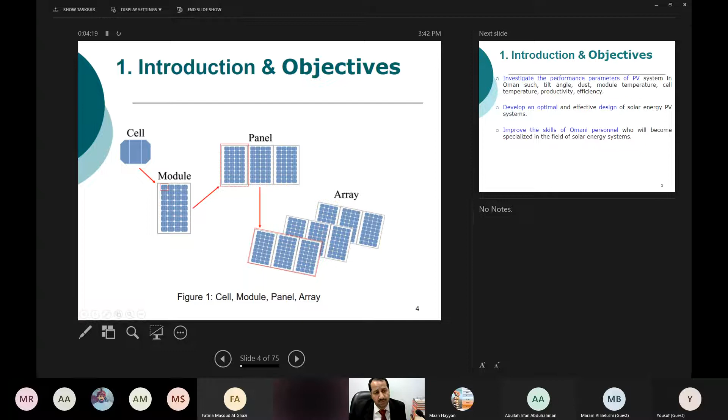If we put them in series, as you can see, we come up with panels. We put them together to come up with an array, or solar plant, whatever you call it, matrix. This is a large part of the energy produced by this array.

In 2011, I got this grant funded by the Research Council - 50,000 Omani Riyal - to answer a question for the government. The question was: if the government would like to invest at large scale, because here we're talking about billions, how should the system we install look like, or the technology to be used? What are the optimum design parameters? What is the evaluation in terms of technical or economical aspects? All these needed to be answered.

You may say, okay, many researchers already started this 20-30 years before. Yes, that's right, and good publications came from different universities and Omani researchers. But what happened is, when we go for investment, it's not enough to have research for research, or scientific research, or basic research, or applied research. We need some sort of research which we call research for investment.

It means we dig deep, because these billions need to be returned back, and there is some profit on them. It's not that we are doing research for education - no, we are investing, so we need to make sure.

Many examples are available in the region where people go directly to investment without having such studies, and at the end it comes up with a fail rather than success.

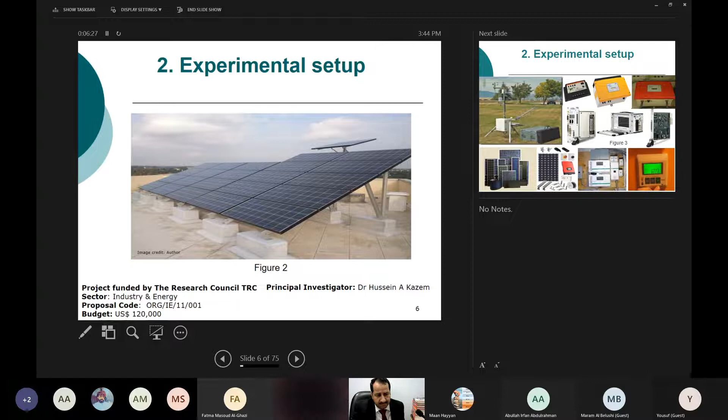So this was the system at the end, and it was funded. The number of this grant was ORG/IE/11/001. It was an opportunity for me to have money, to bring equipment and to establish a renewable energy lab.

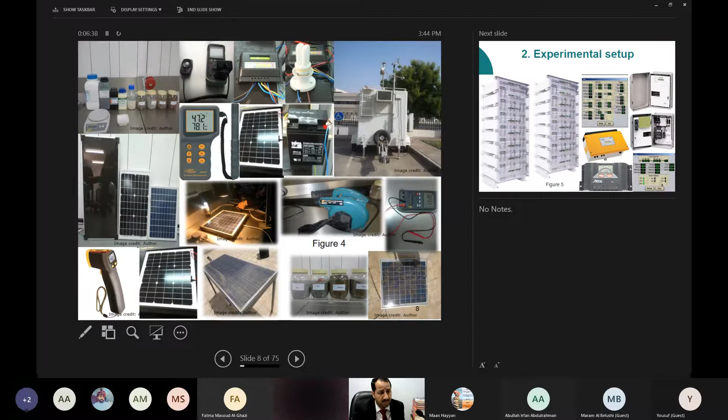These are some of the equipment we purchased through this grant. And as usual, I thank the Research Council of Oman for supporting me all these years, and I was engaged with them in many of their activities.

And then the difficulties came when I started executing the project. You know that any project needs to start with theoretical calculation, literature survey, methodology, and these stuff.

When the idea is clear in front of you, you move to installation, purchasing equipment, and then installing. I would like to take you on a journey through a few photos. The photos will talk about themselves, and there are many stories behind each one. I try to summarize here the important photos, otherwise there are many.

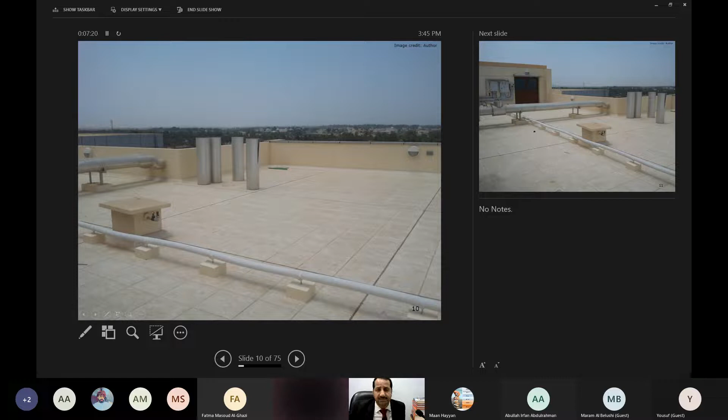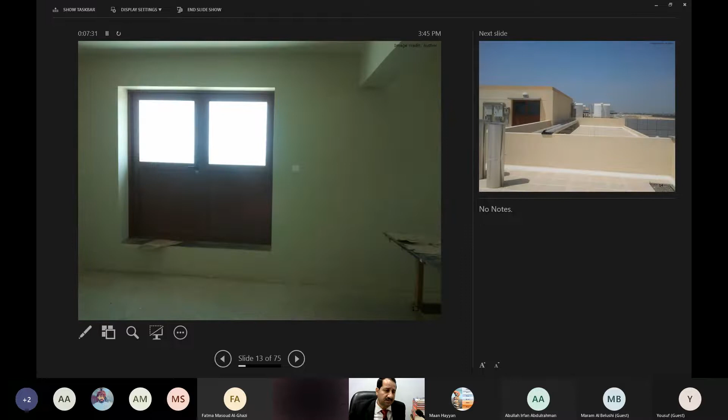This is the place given to me on the engineering building in Sohar University. Look how it looked like at that time - this is 2011, inside the building on floor level 4, and as you can see here, how it looked, the location. Then I start putting a plan to have two labs, one for the students and one for research.

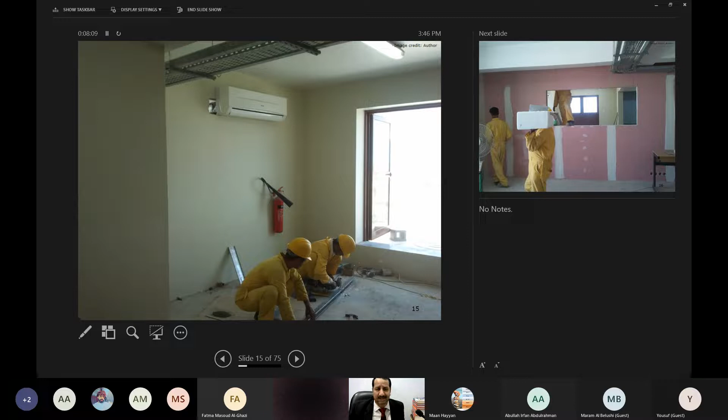Since I've been teaching renewable energy course for Sohar University since 2007, which was the first course in renewable energy in the Sultanate, I start to engage and introduce all the concepts which can be used and linked to my course, because when the students come to the lab, they can see what they already studied in the theoretical part.

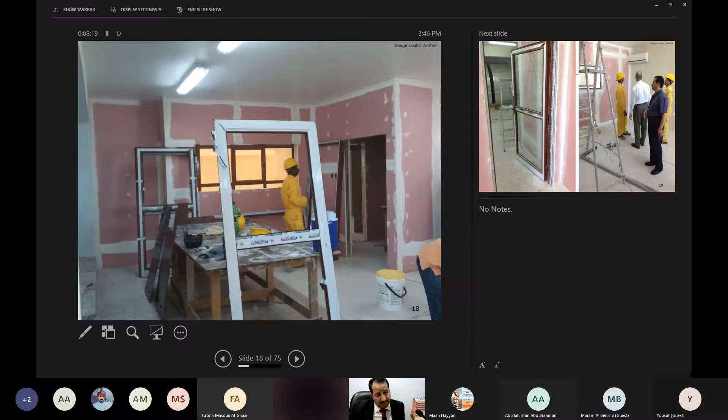So eco houses principles, using the material, all these have been introduced in this lab as much as I can. Then I try to spread them out, as you can see, and we build the doors, the installation, electricity, painting. You can see here the trunk for the electrical installation part.

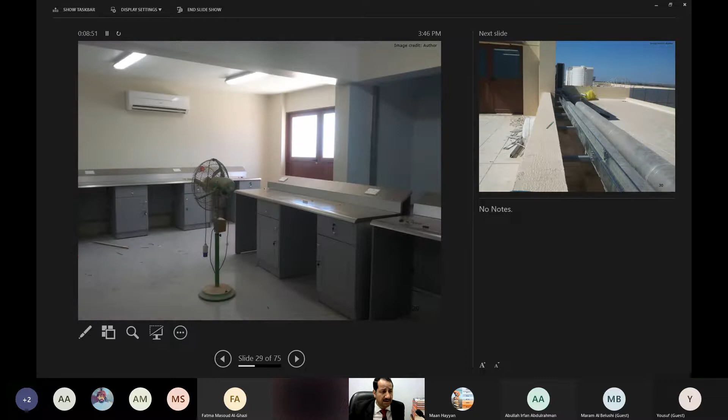Then we moved to have air conditioning. This part was supposed to be a store, but without electricity, with nothing. Then I started establishing it as a renewable energy lab. It's a small lab, but still its productivity is high. Then I brought some furniture for the renewable energy lab related to the students.

And this is, I put here trying to have the cables going to my lab, because I put our equipment outside. Then we clean the place.

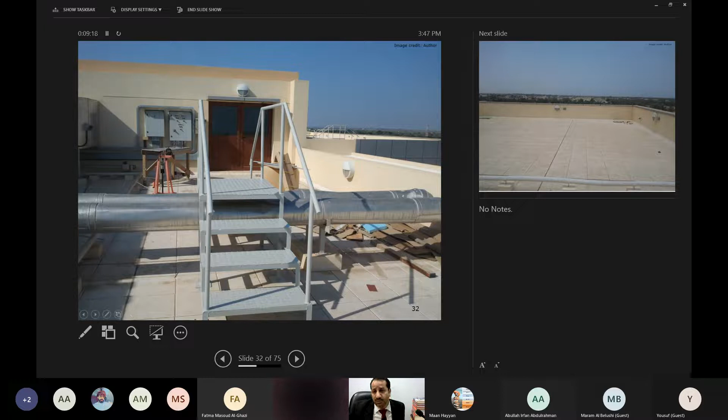But at that time, you know, this region - talking about the Middle East in general - they just started, it's 30, 40 years back, started with research. Still people are not familiar with the grants, with deadlines, blah blah blah. So you imagine this ladder took from me 3 months with dozens of emails to convince people there that I need a ladder, because students cannot jump crossing these pipes.

And then we start doing the concrete and take it to the other side of the building, and then this winch took the concrete to the other side of the building, and then we move it into the right location. This is the weather station where it went.

By the way, the budget was limited, so I have to try to spend it carefully and make sure that I brought as much equipment as possible. Sometimes I need to sacrifice. As an example, in this weather station, I couldn't bring an expert to install it because it would cost around 5 to 6,000 Omani Riyal, which I wanted to save for other equipment.

So I did it by myself, and I learned a lot about the weather station - how you connect the sensors, how you set them, how you program them, and if faults happen, what you should do.

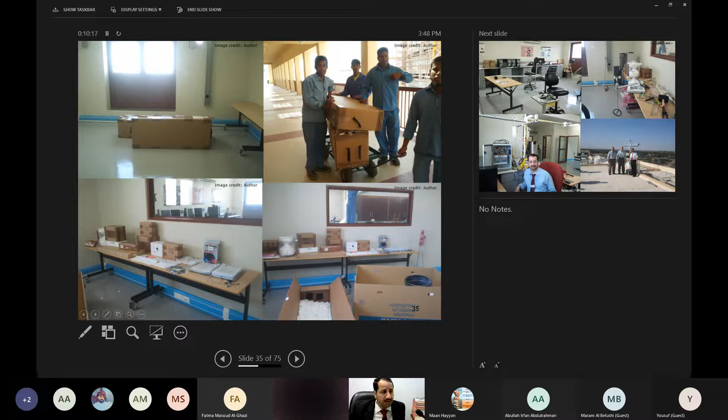And then I moved it here to the lab. Then I opened the sensors here - it was at that time 13 different sensors, and I start connecting these sensors on the weather station. Here I'm programming the data logger, and then I put it on top of my lab.

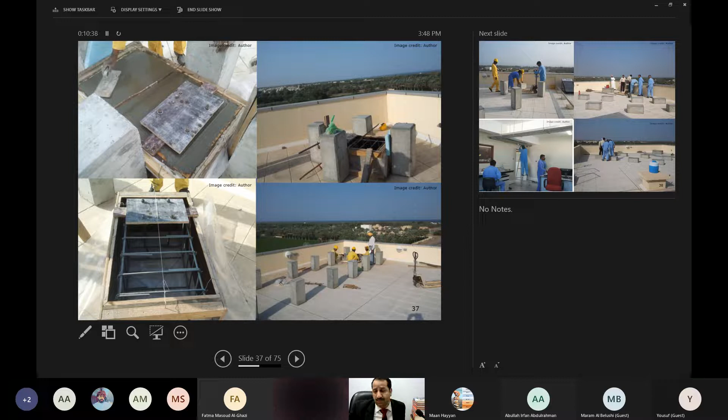Some concretes for specific systems need to be produced on top of the building, so we did this one for a tracking system, as you can see here.

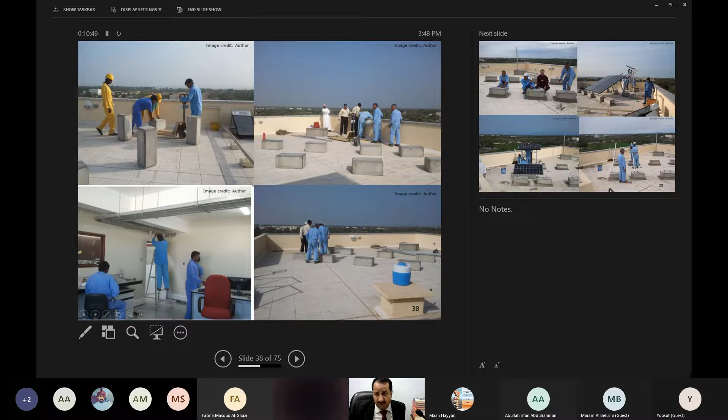After that, the company I worked with came to establish and install the system according to my calculations - the orientation I chose was based on the calculation - and then we start building the system, as you can see here, step by step.

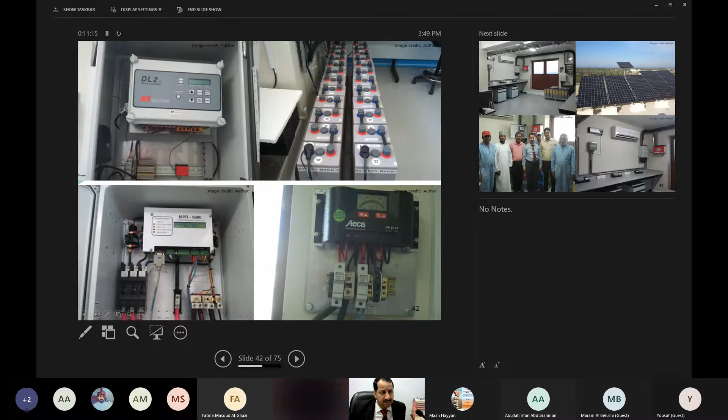I leave photos talking about some people working inside the lab to establish the data logger, collectors, batteries, loads, sensors - these are the batteries, data logger, charge controllers for different systems.

And then here we have, outside, the three systems: this is the grid system, this is the standalone system, this is the solar tracking system. And then inside here we start - these are people working on this project to establish the system.

Then I decided to have my own monitoring system. I selected at that time state of the art sensors used in the field, and then I made a plan for having a specific data acquisition setup. I designed it using my skills in digital logic and digital electronics.

Then I worked with a specialist, Dr. Riyah from the UK. He came here and we worked together to build this sensoring system to make sure that my data, taken from different sources, for research and for investment purposes, could be calibrated so we could compare between them. So we did this as part of, let me say, creativity.

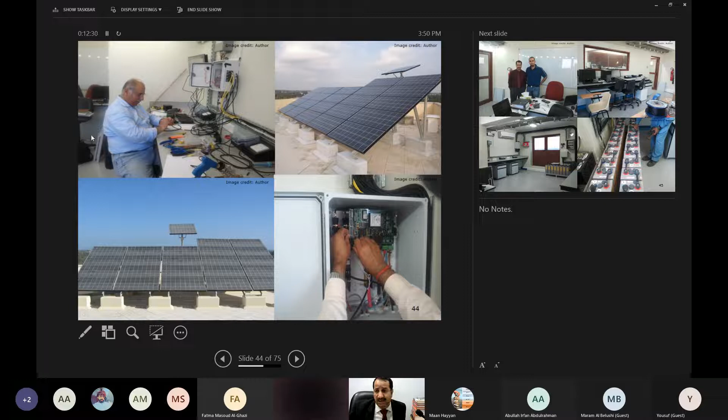And this is Dr. Tamer, my research assistant at that time. We worked together on this project, and here we have the system ready.

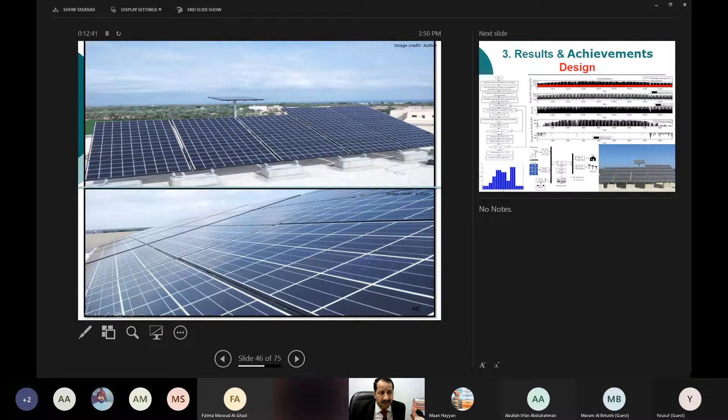For achievement, we published many papers, around 40, Q1, ISI and Scopus, in top ranked journals in solar energy, renewable and sustainable energy, energy conversion and management, sustainability, and many others with different publishers, including Elsevier, Springer Nature, Taylor and Francis, and many more.

So here I'll just pick part of my results. You can see here, on the level of design, we have a lot of information we came up with. I'll leave that there. By the way, at that point when I started working on the design to find the

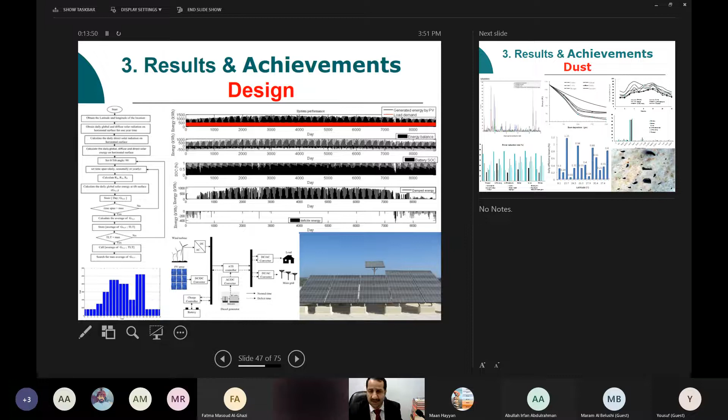optimum design for Oman, as you know, any location is related to its latitude and longitude. It will not change since it was created, since God created this planet. It is there, it's specified. But until I started this study, nobody had found the optimum design parameters for this location, which is Oman. I got it, and it's fixed. Whoever comes after me to find the optimum will not find something different from what I already got. So this is, let me say, my fingerprint, if you can say.

And then I investigated dust, many publications published on this, and it was really important to have studies on dust, especially in this region, which suffers from dust, solar radiation and temperature, and their impact also.

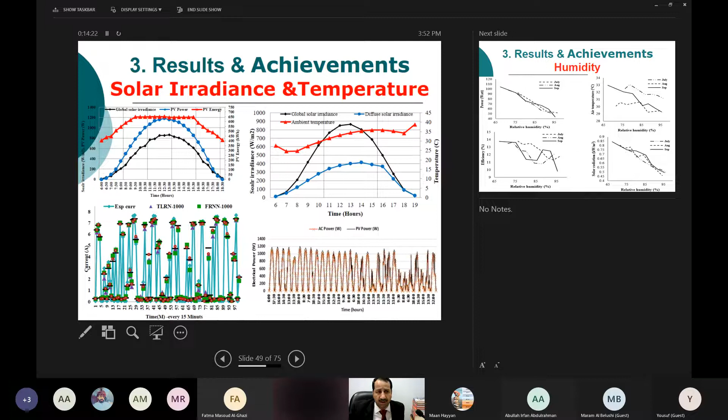If you would like more information about this, you can just Google it or access my ResearchGate, Scopus page, or Google Scholar, and search solar energy Oman. You'll find many of my publications with more information about solar energy. We also published on humidity and its impact.

But here the creativity came. Have a look at what I did. I thought that through the literature survey—it's my advice for you at this level—to spend time reading and acknowledging what people did, but at the same time criticize them, write your comments on their work, and then look from the side that they missed. Because, as an example from myself, when I do my research, I'm looking from one side, maybe two sides. I may miss many sides.

People publish their work and they look from one side. Most people working in the field, to my best knowledge, look from one side: they look at the sun and the weather. They never make themselves the load and look from the sun toward the load. I made a mirror, and then I started looking from the sun toward the load. That gave me a lot, because now I'm looking from a two-side view, not a one-side view.

Also, people try to investigate the impact of design parameters, irradiance, temperature, or dust, whatever. But sometimes they include only two elements in their study, as an example, temperature and dust. But it never happens that, if I study dust or temperature, I also look to the other side and try to see the impact of design elements on the temperature of the photovoltaic, or irradiance on temperature, or cell temperature, or dust, or humidity, or two elements together. In this way, you're not just looking at temperature itself, but the correlation between temperature and other environmental parameters.

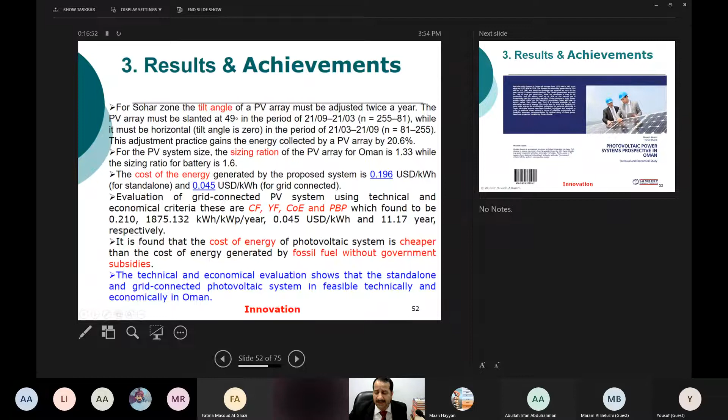This was really new, and I came up with important achievements in the field. For innovation, as I mentioned, there are many elements that are fixed but hadn't been defined before this study. In this grant, I defined things such as size ratio, cost of energy, capacity factor, yield factor, and payback period. All these design parameters have been specified in this study.

The main few papers published from this research grant, I tried to publish them in a book called Photovoltaic Power Systems Prospective in Oman, Technical and Economical Study. It's useful for people looking not only for research, but also for investment in the field.

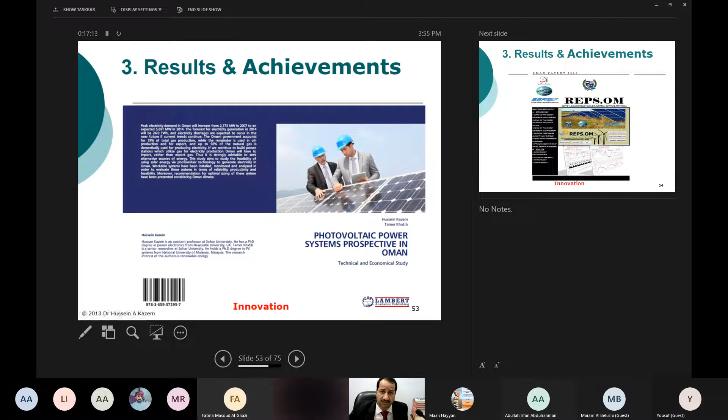While working on this design, there were many softwares around at that time, around 32 or 33 softwares available globally. I read about them and even tried around 10 of the best of these softwares, but I found some points missed in these softwares. Besides, most of these softwares are designed based on your input, so it's not smart enough.

So what I decided: first, I would include what is missed by these softwares, in terms of performance evaluation. Second, I would try to have my own algorithm, supposed to be smart, to come up with a real system, not a theoretical system.

So I made a smart algorithm and designed this software. It's registered in the ministry as REPS.OM, which is Renewable Energy Power System Optimization Tool for Oman, very simple and easy to use to design different types of solar energy systems.

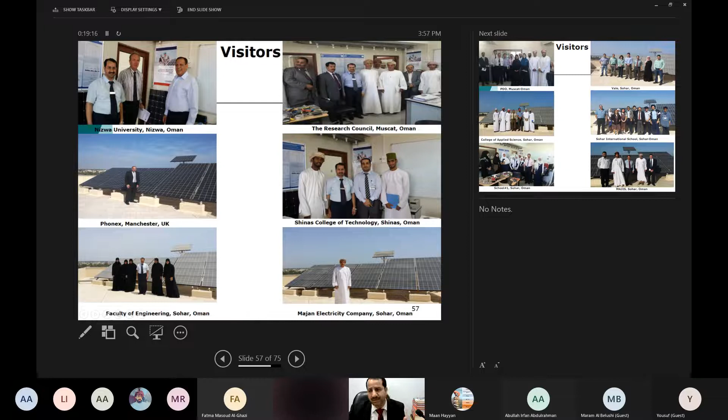I will note about each one of these photos, there are many stories, many people, and a lot to be said, but I don't have time to talk about this. As you can see here, visitors coming from different locations.

Now the takeaway, the conclusion. What I will talk about now is community service. Always in my talks, I tell people: okay, you work in a university or research center, I know you're focused on research grants and so on, but frankly speaking, we need to think more about the community.

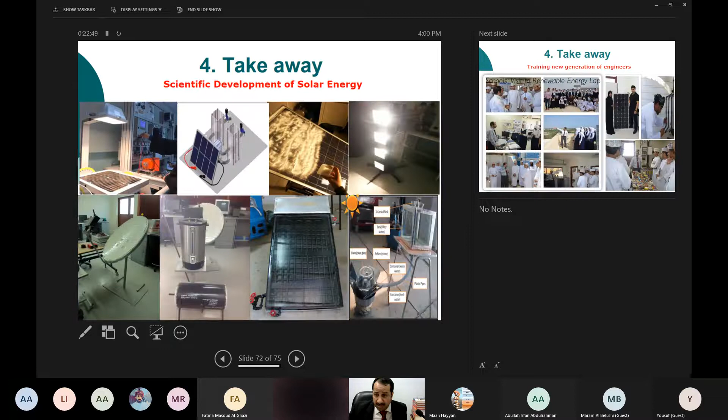Here are samples of our projects done by my students, I work with them. It's also important to be engaged with the community through schools, primary and secondary school. If there are students close by, it's good to engage with them and transfer the knowledge. These are some of our engagements with the community. And I will stop here.

It seems I talked for 43 minutes. So thank you for listening. I will be happy to receive your questions.